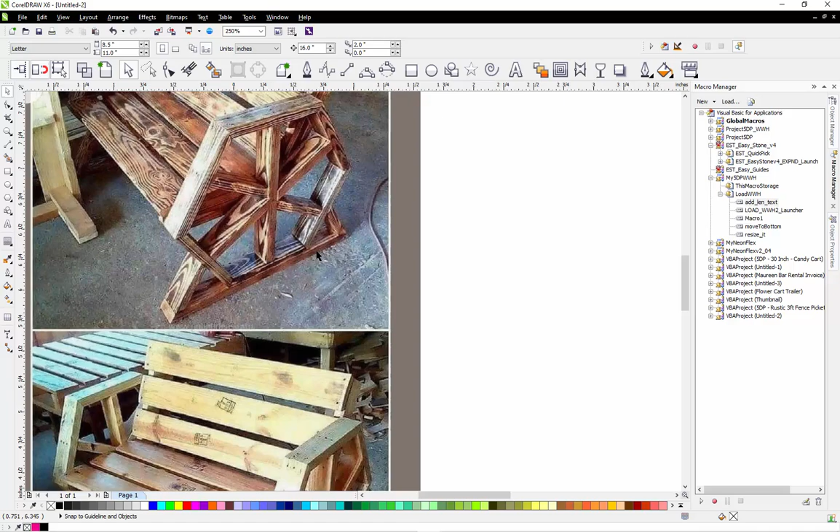The only other thing in this particular design—I'm not in love with these supports. I don't think they're necessary. I think this bench will have plenty of stability without that, but I won't really know until the bench is actually built. I believe this bottom board will be plenty of stability without the supports, but you can see this support board goes straight across here. So in the event that we needed to add that support board, we always could.

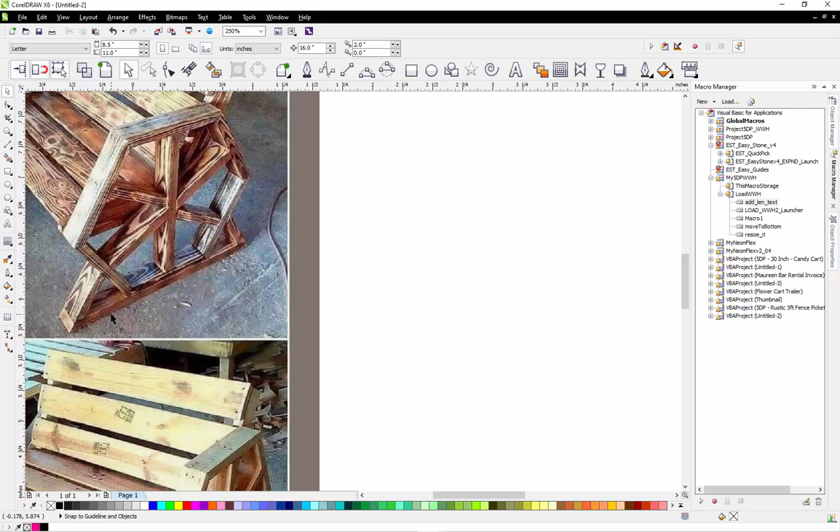If you look closely, it's actually a complete wheel with the support board added to the bottom. There are actually two thicknesses of boards here. So if we need this support, we can always go back and add it in the end. Maybe that's what happened here—maybe they made this, then decided they wanted a little more stability, and added that support board as kind of an afterthought. That's certainly possible, but at any rate, those are the considerations.

So we'll go ahead and get to laying this out and show you how it works. The first thing I'm going to be using here is CorelDRAW for my 2D layout, and I usually use a combination of CorelDRAW and SketchUp.

Of course, SketchUp is free online. And CorelDRAW I've been using for tens of years, so that's what I'm most familiar with. But certainly any application like Adobe Illustrator or Inkscape, which is a totally free vector graphics application, and there's dozens of others, you could do the same process with any of those programs.

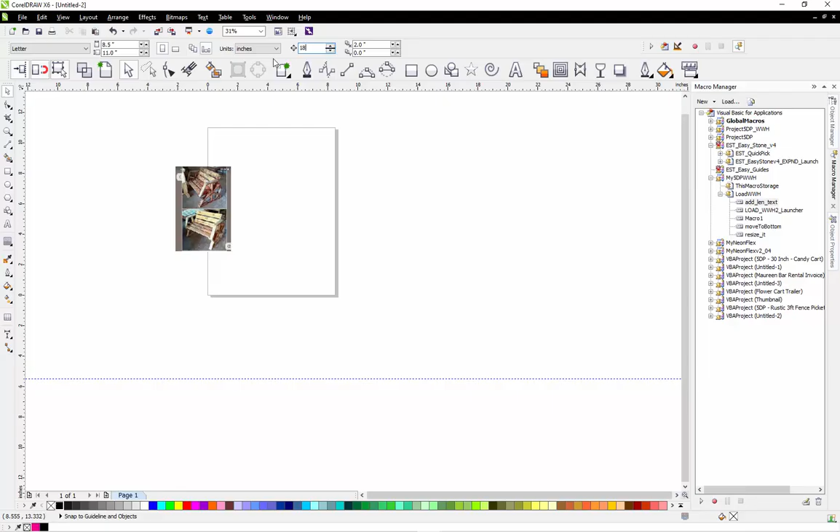So the first thing I'm going to do is pull down a guideline to represent my ground, and then I'm going to offset that guideline 18 inches, which is going to be my seat height. So there's my seat height.

I am going to create a rectangle and make it 1.5 inches tall by 7¼ inches wide. And then I'm going to copy that over and make another copy and make it 3½ inches.

So what we're going to do for our bench seat, for this example anyhow, we are going to do a 2x8, a 2x4, and then another 2x8. And what that gives us is exactly 18 inches. So then we'll make this 3½ inches tall.

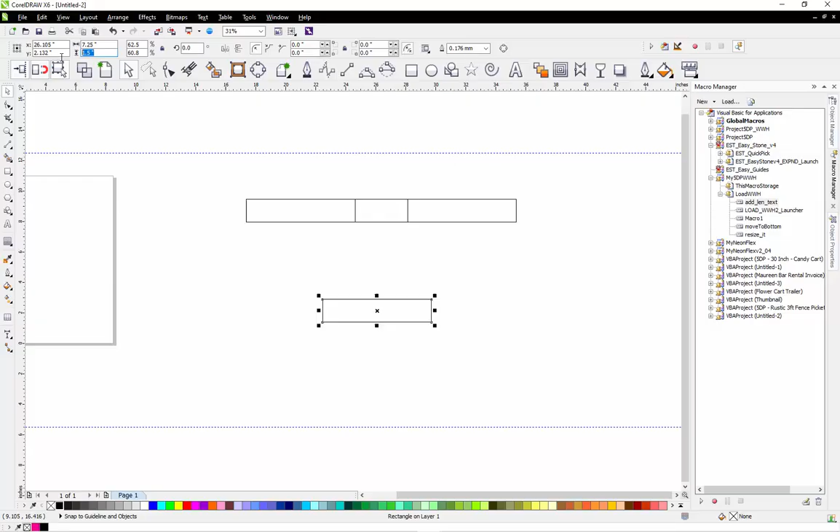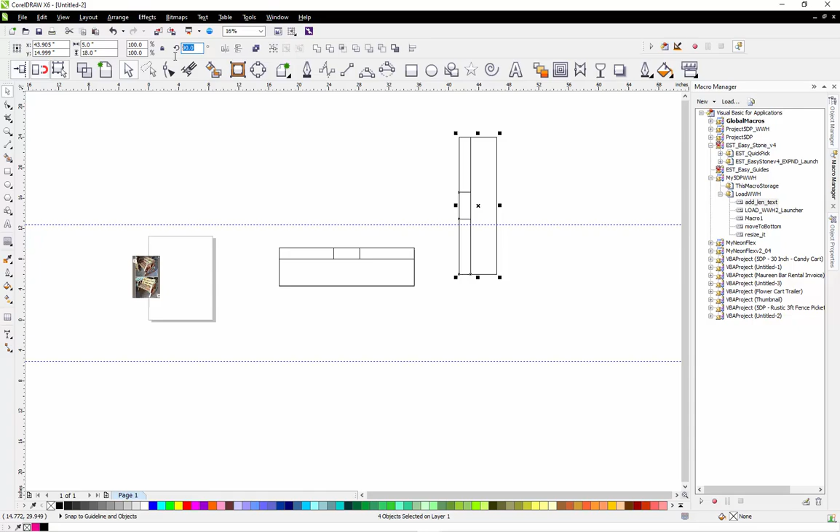This is going to be a 2x4 for the frame of our bench. And then our back is going to be the same as our bench. So there's our back, and we want it to be at a 10-degree angle. So that's what 10 degrees looks like.

Okay, so now we need to go ahead and create our wagon wheel. Now we're going to move our bench up to that 18-inch line. So there's our seat height. So now we're going to make our wagon wheel.

So I'm going to just draw out a line, and I'm going to make that line 16 inches. Now there's nothing magical about that dimension. That's just where I want to start at and see how the wheel works out.

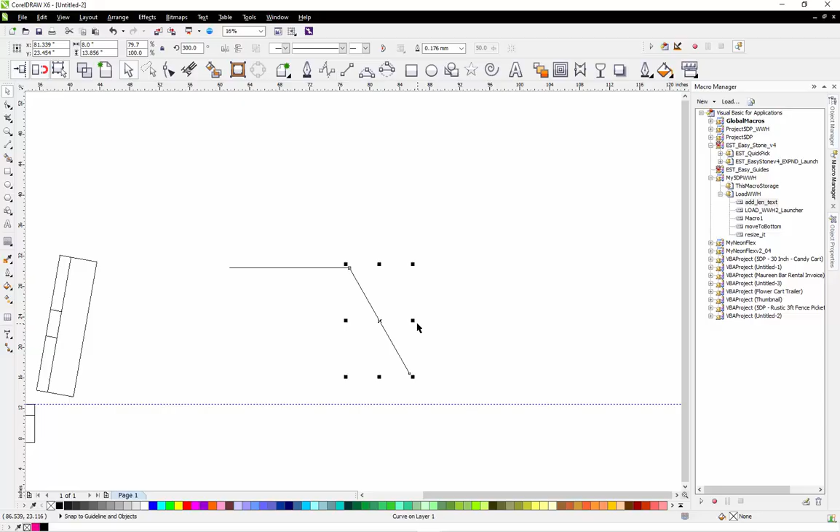So we're going to make a copy of that line, and then we're going to rotate it -60 degrees. There we go. And then we'll bring this in, and then we will flip it over, and it's going to go over here. And then we're going to flip this down, and there is our wagon wheel. Okay, so it's a 6-sided wheel here.

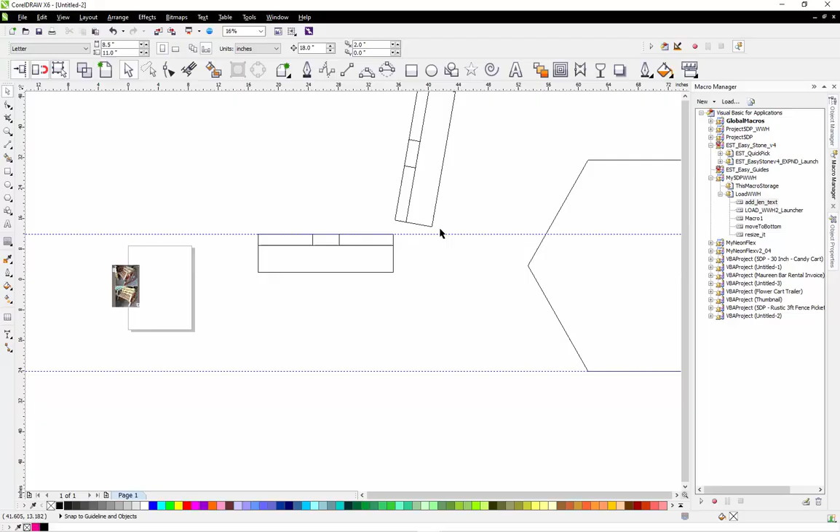So we're going to put that on the ground like so. So the next thing we're going to do is, let's take this and let's combine it, and then let's do a contour to the inside. So how are we going to do that? Let's see, yes, we want.

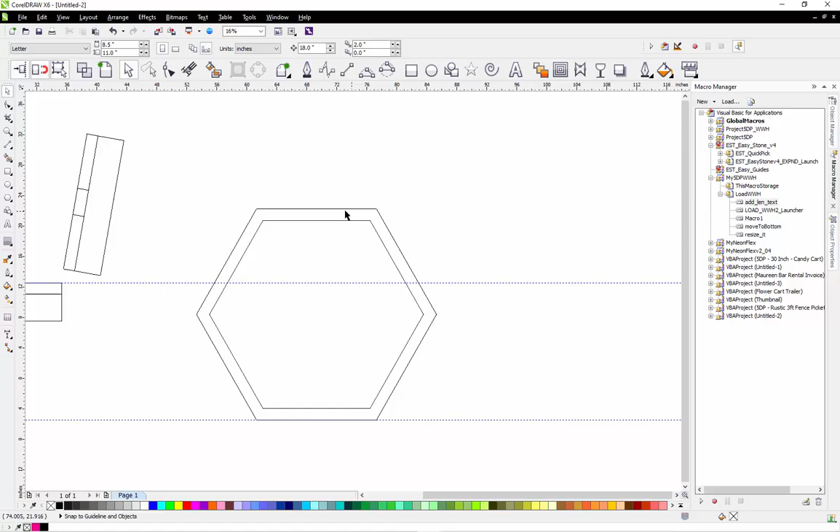Let's back that up here. So we're going to do 1.5. And then we are going to break this apart. So this outside one we don't need, let's break that apart. So we just need this inside one, and this is 1.5 inches. Okay, so that is what we want.

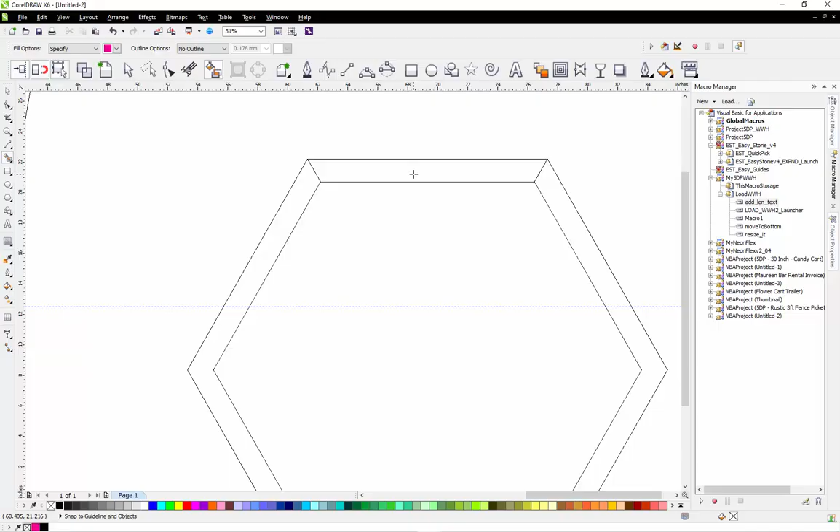Let's see here, what do I want to do? Let's go ahead and do this here. So let's go ahead and use our paint bucket tool and fill that in like so. And then let's just get rid of the rest of this. So this is the board that we need to cut. It's going to be 16 inches long, it's going to have a 30-degree miter on the ends here, and it's 1.5 inches thick.

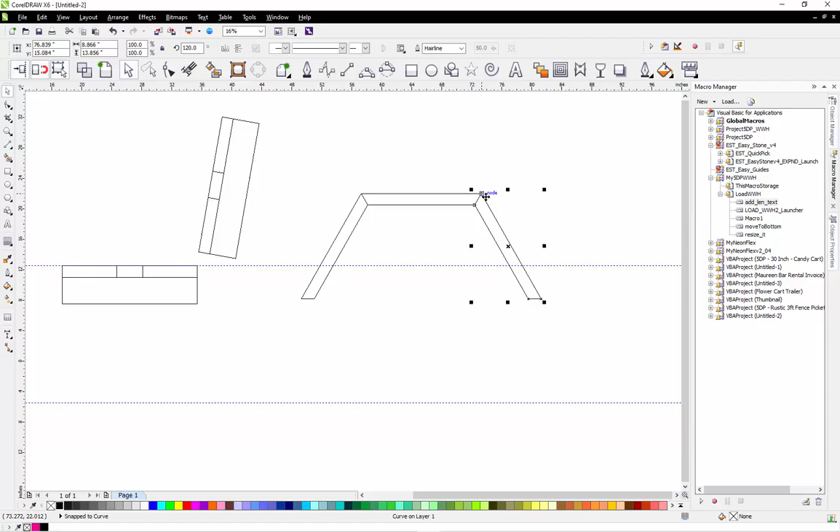So that was one question that we had, was what size board do we need? So we need 16-inch boards. So we're going to do that, and we're going to mirror that over here, and then we're going to mirror that. And then we're going to put this right on the ground.

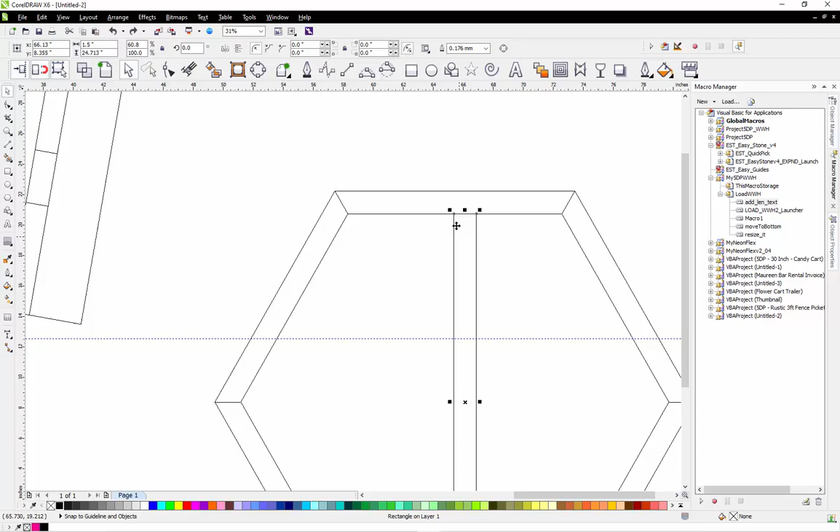Okay, so now we know that according to the picture that we had, we have one vertical piece that is 1.5 inches. So it's going to go right dead center of that. And then we had this piece that—what we're going to do here, let's see, what do I want to do here?

Let's go ahead and we'll fill that and that. Then we can get rid of—let's rotate this like so, and I'm just going to push this up like so for a moment. So these here, we are going to have no fill, go like that.

All right, so this right here, we're going to do something a little bit different. So this point right here, we want to move down. So let's go ahead and do that real quick. So let's take this.

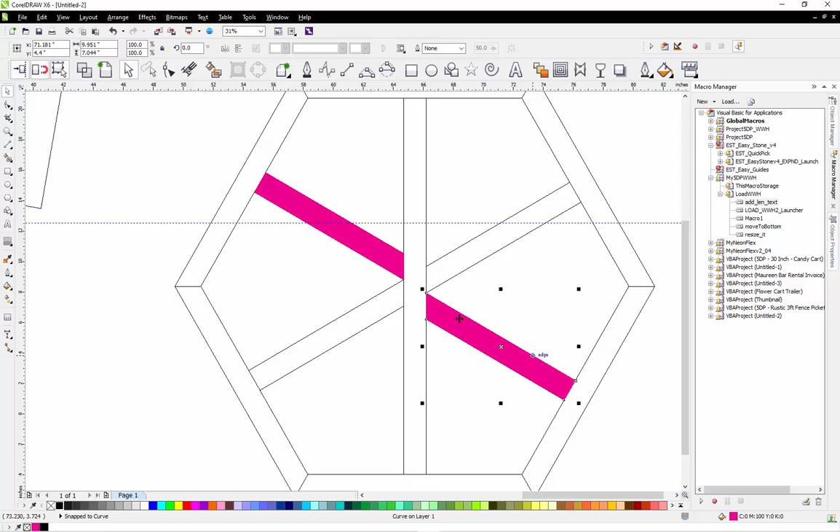We're going to add a node so I can then pick that up and move it right there. And then we're going to take our fill bucket, and move this down. Take that node and put it right there in our fill bucket like that. So then these two, we are going to have no fill, right click, and that's our wagon wheel.

Now let's compare this to the original drawing. You can see here we have that one vertical member going through. Now this horizontal member here, you can see it's going straight through to the other side, where here it's not. See where it's offset and offset? The reason they're doing that is so that this board doesn't need a double angle.

Now, I'm not sure I'm in love with that look, but that is how it was made. So that's what we're going to run with because that's what was requested. So now we have our wagon wheel here, and I'm going to just slide it over, and that's basically what we've got going on.

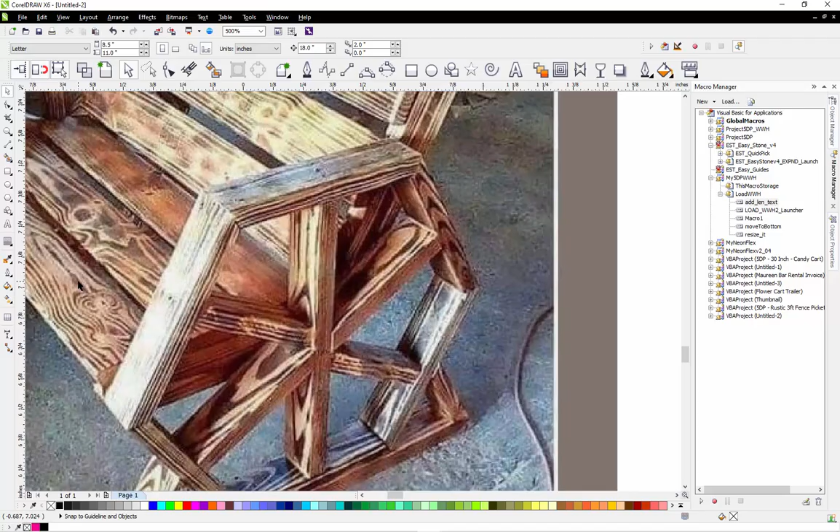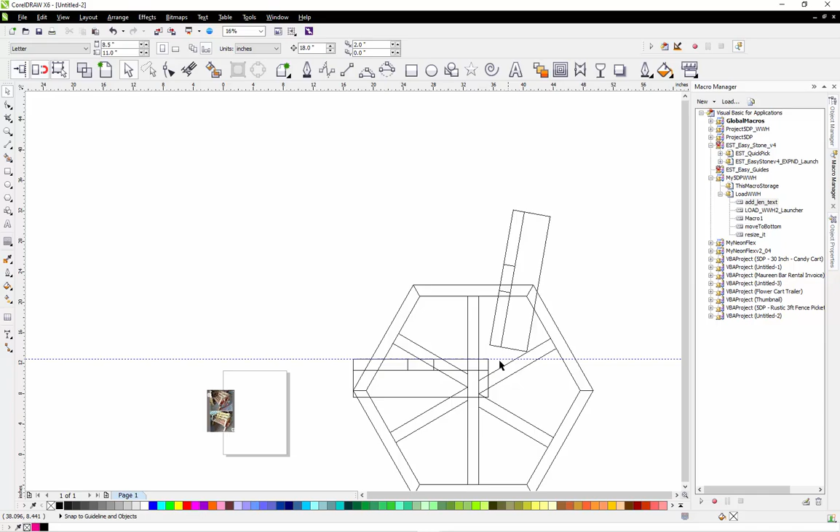So one of the things we want to look at here in the original was this horizontal board here. You can see we can't see it much beyond that. So we have to think about, so our seat support can go here, here, here, here. So as far as the connections go, this board can be mounted here, mounted to this one. There's plenty of screw locations there and here. So I think this is pretty good as far as being able to have something to screw and support everything the way we need it to.

Now, we don't know what the height is here, but look at there, 9 3/4. So that actually worked out really well. Remember I said we wanted 9.5 to use that as an armrest. So that's okay. So the only really thing we got to do is fine tune the position of this.

If we just did it right there, that looks pretty good. So I think what I'm going to do is, what do I want to do? I think let's do this. Let's move it. I'm going to move our back a 1/2 inch back and a full inch up.

Maybe I want a 1/2 and a 1/2. So we have this gap right here. No, I think we can go a full inch. So I think that works good.

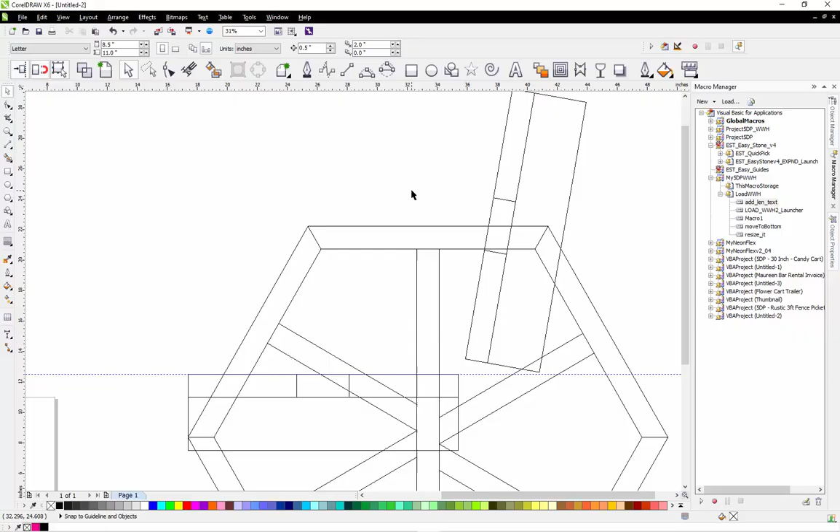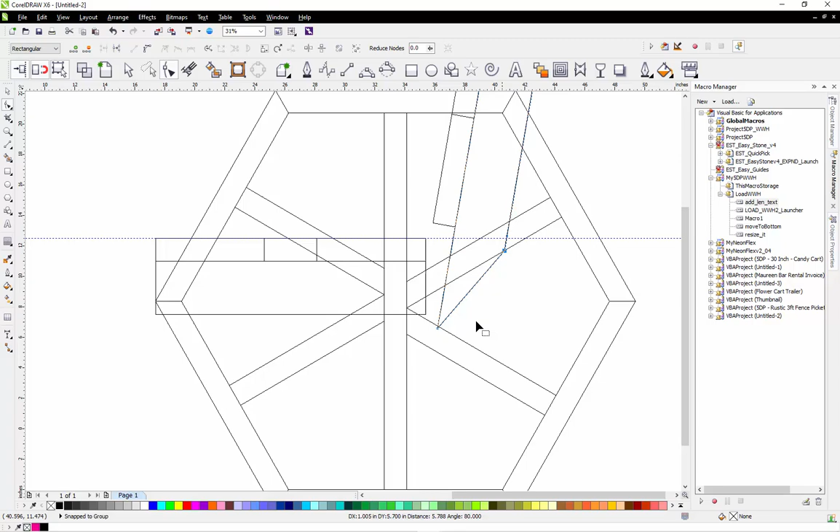The only other thing that I'm going to do for our back here is we're going to extend this. So let's do that real quick. Let's extend that. But then we're going to cut it back so that this is in line like that. So we're going to screw there, screw there, screw there, and that will support our back really nice.

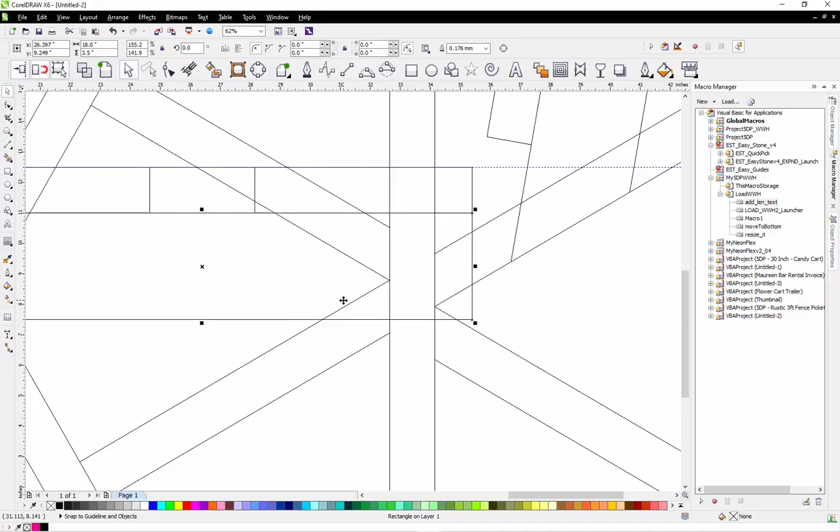And I'm thinking here on the front, on this other piece here, I don't know. No, I think we're good there. The only thing I might do differently here is let's see here. I'm trying to think. I'm going to cut this off. I'm just trying to figure out exactly how to do that.

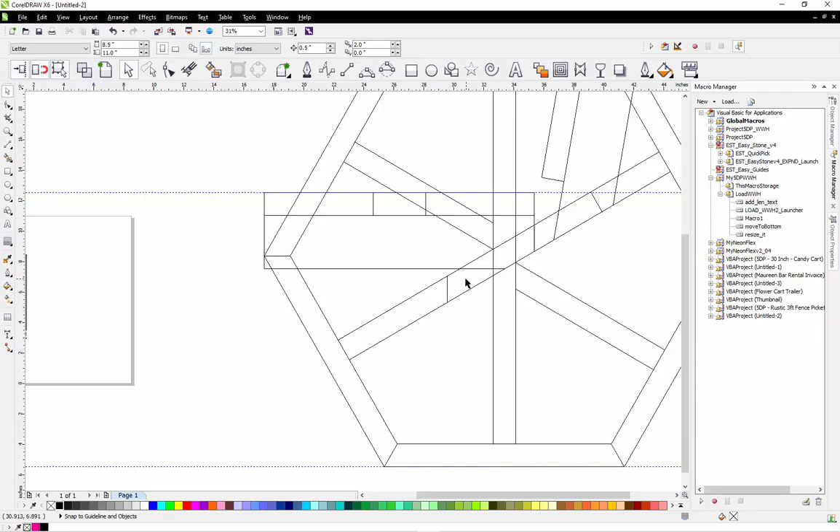So this seat board here, bring that back to here. So we're going to just chop that off just like that. Okay, so this is our seat board, and this is our back. And I think that looks pretty good. I think that'll work out.

So that is essentially how we would go about figuring out how to make our back. Now, I think what I would do, let's see here, just to polish this up a little bit. Let's go ahead and make that back to 90.

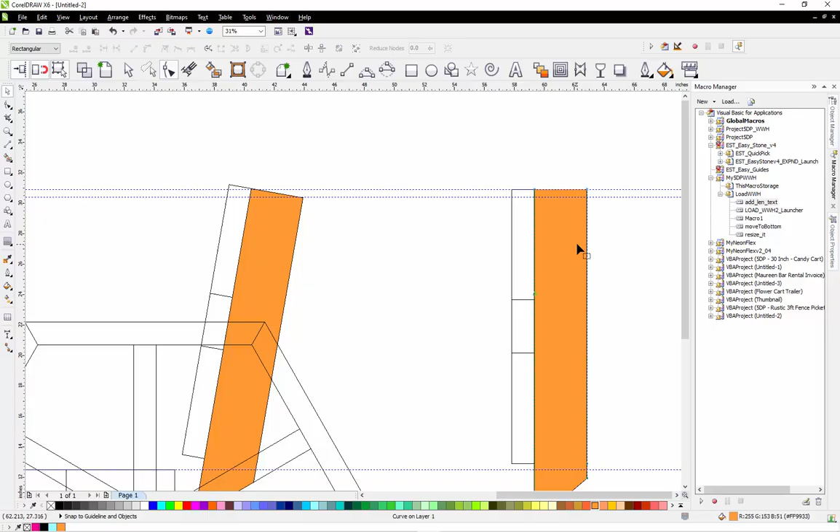So I think to polish this up a little bit, I would go, yes, a 1/2 inch. So instead of having this go all the way up, I think I would stop it there.

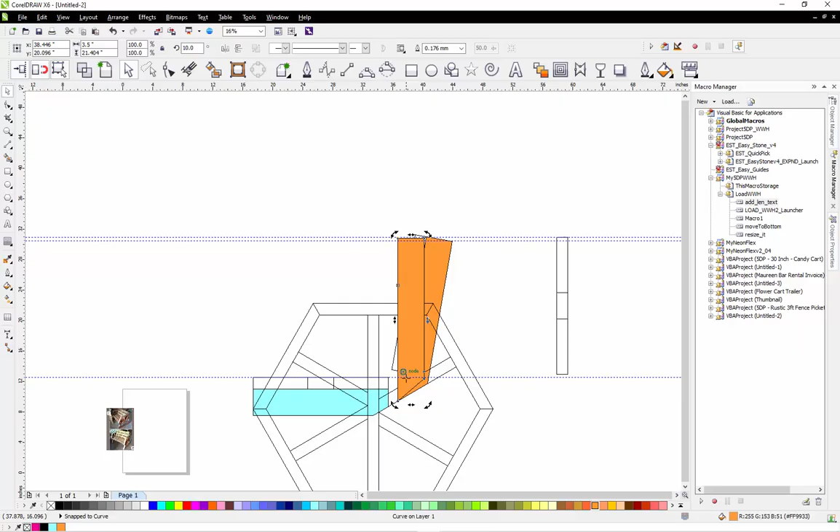So we'll move that back down like so, and just delete that one. There we go. So that looks good. So we'll do that.

And then for the front here, we'll do a similar thing where we'll just push that back like so. And I think that looks pretty good. And if you look at the original, you can see how it was kind of pushed back too, but this was kind of chopped off here at the front. So in this case, I don't think it's really necessary.

So as far as screwing in our seat board, we'll have this piece we could screw it into, this piece we could screw into, this piece.

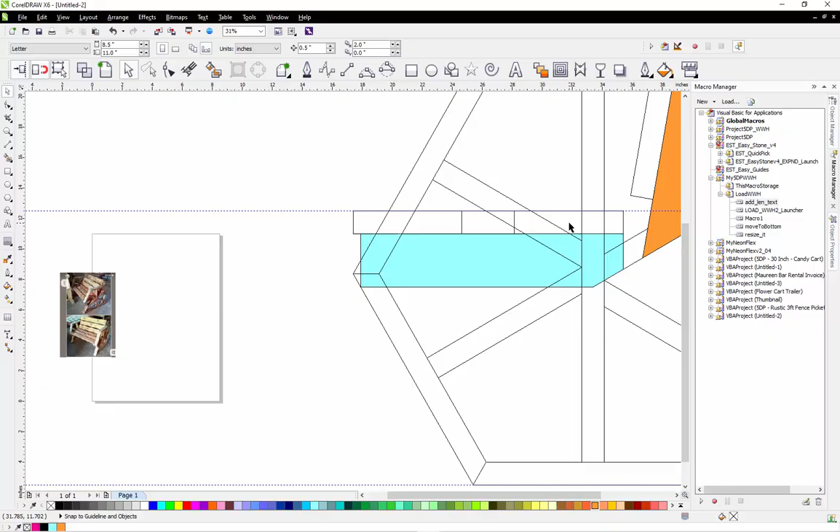So we can have 2 screws here. I think it'll be plenty strong support-wise. Really, we just probably have to build one and see if that configuration works.

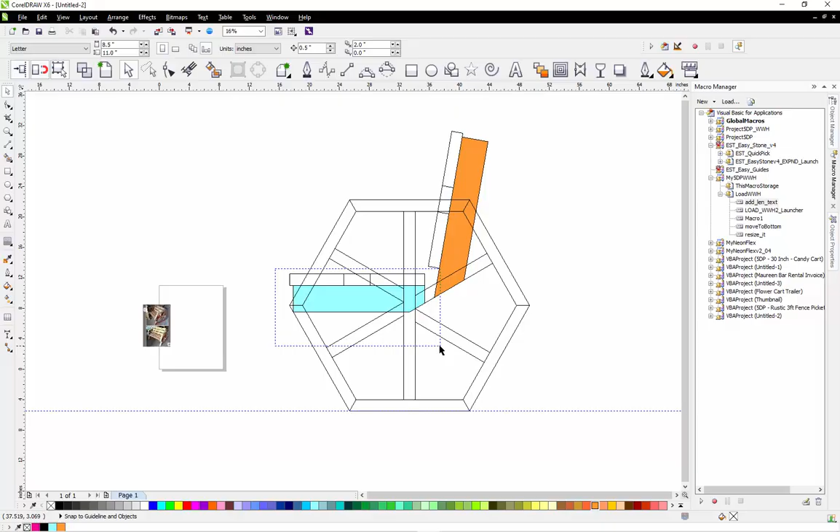Okay, so now what we have to do is kind of pick apart all of the different dimensions and angles here to make sure we've got it all. So what I would typically do is take this lower seat assembly, take this upper seat assembly, put it like that, and then take our wheel here. Looks like I got most of it.

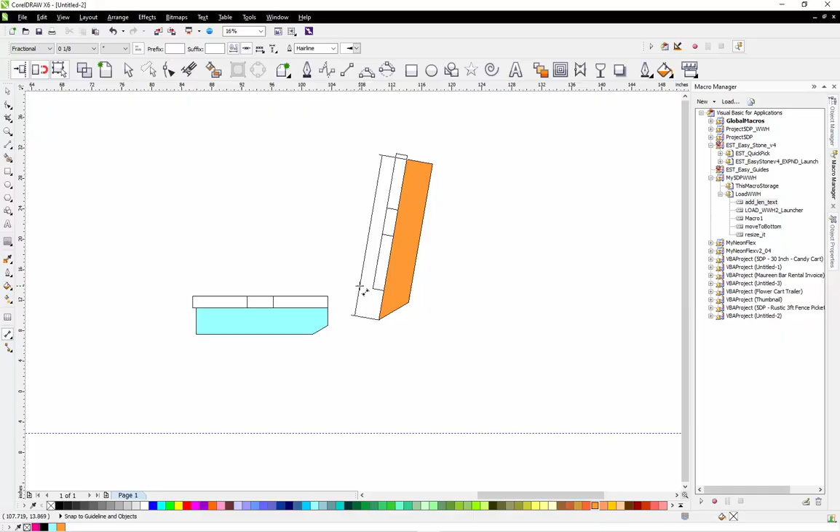We'll make a copy of that so we have some dimensions to work off of. So right here we need a dimension there. Okay, so that's 21 3/8, and then we need a dimension here. So we'll go with a horizontal dimension. So you see that's 17 and a half.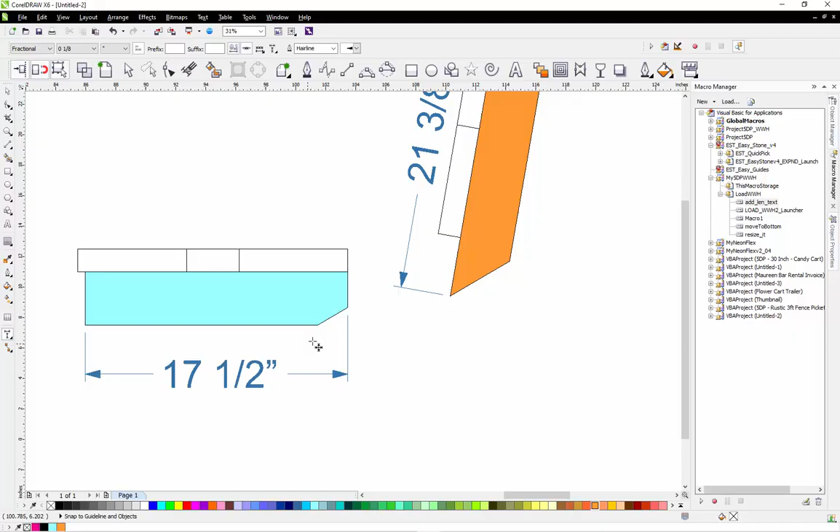And then, I'll tell you what, let's undo that because we need this dimension, but we also need this dimension, and then we also need that dimension. So then we're gonna break that dimension apart and slide it, we'll do that like that. Okay, that works. And this is how I like to do it when I'm dimensioning things.

We can also put what that angle is, and that's fine too. So let's figure out what that angle is. If I were to rotate that, it's 60 degrees. Okay, so we can do that too.

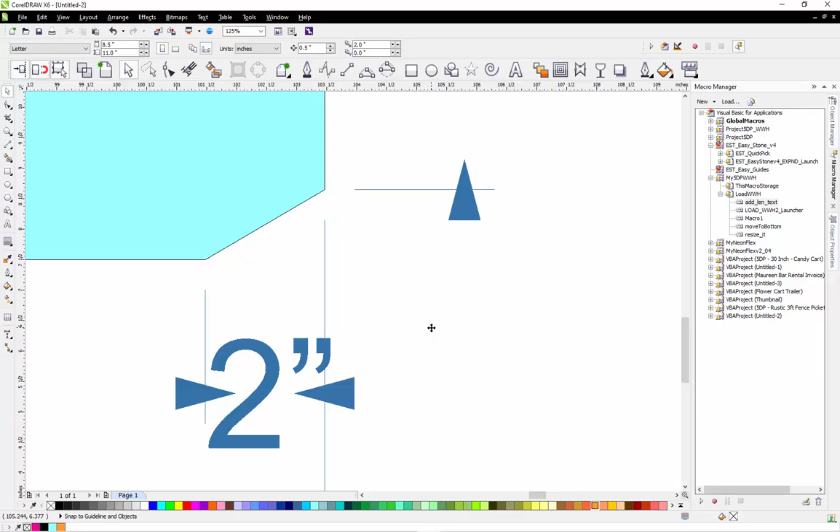So the problem is, most of your miter saws can't actually cut a 60-degree miter. So that's why I just use the 2 dimensions, and then I probably won't even put 60 degrees because of that. Now this dimension here, or this angle here,

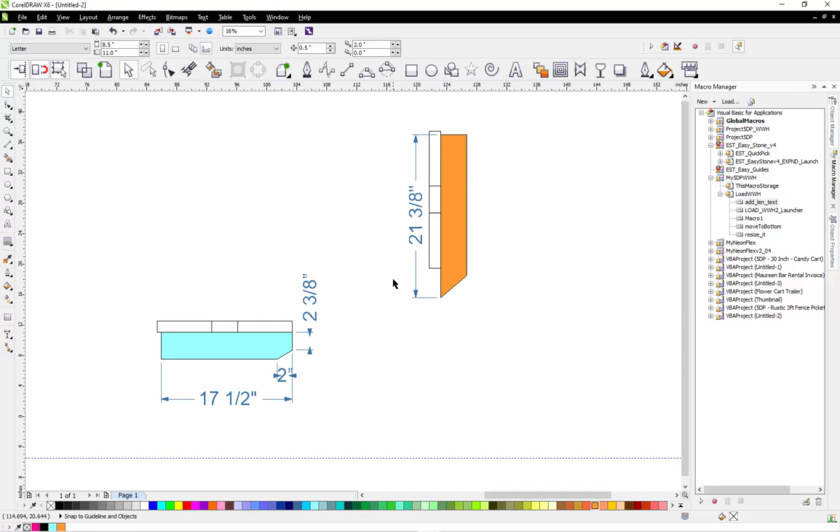if we make this, let's rotate that 10 degrees. So if we do this, right, and then we rotate this, so now you can see that's a 40-degree miter there. So we could just type in, okay, so that's 40 degrees.

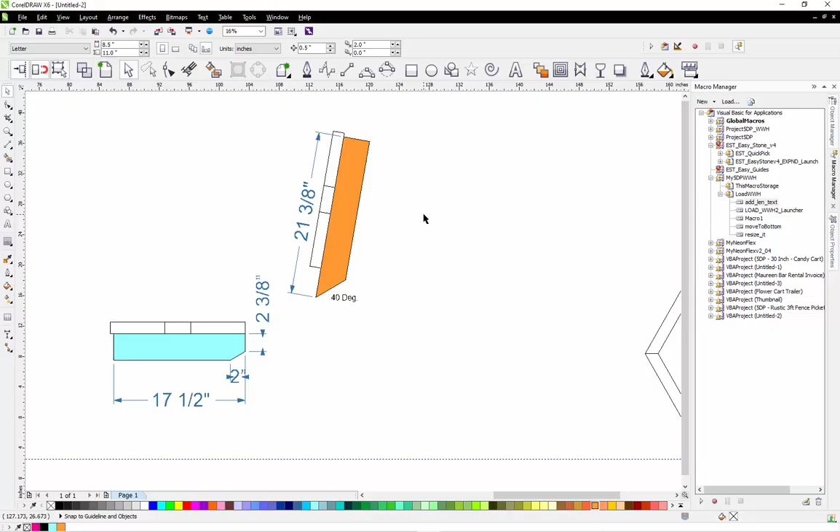And so we make a board that's 21 3/8 long, but then we cut it right there at the tip, and we cut it a 40-degree angle. Okay, so there you go. So then we can go back to, and we might label that bottom seat assembly, back assembly, something to that effect.

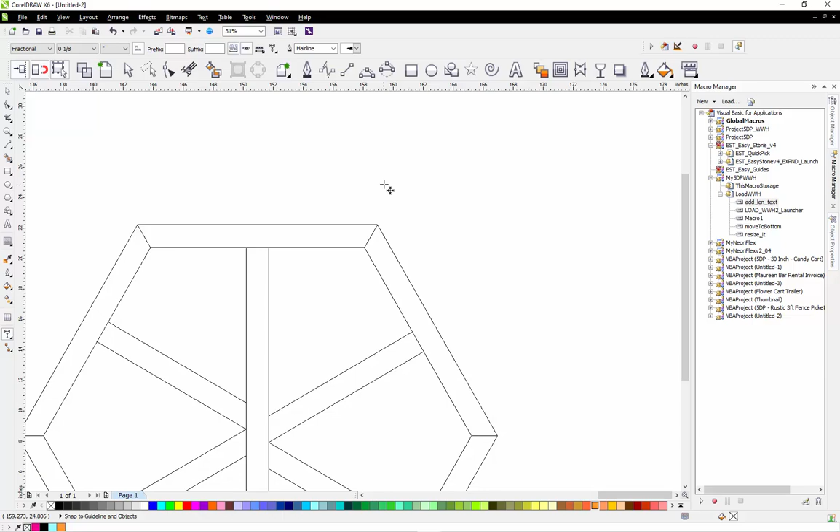So then next up is the wheel. Now the wheel is pretty straightforward because we know that each one of these pieces have to be the same, so that's 16 inches. And then we know that each one of those corners need to be 30 degrees. So there you go, there's 30, and 30, and 30.

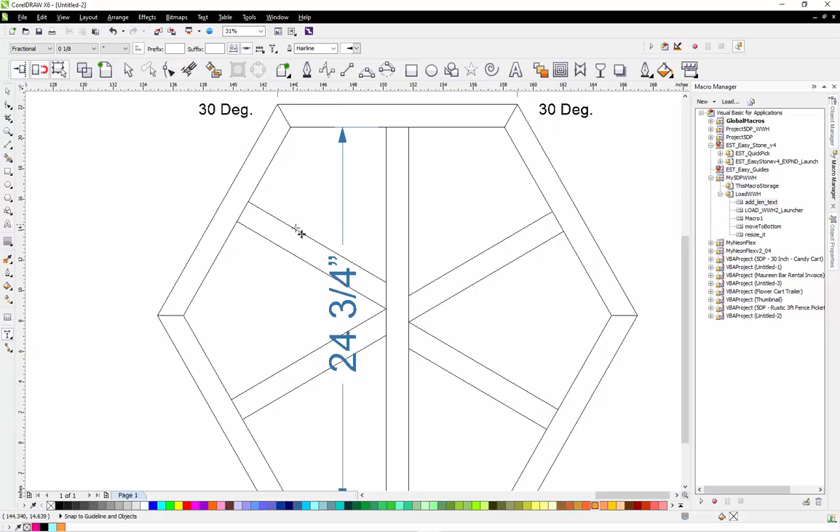Okay, so then we need our vertical dimension here. I guess we could do it this way. It can get kind of messy, so these, really, because of the precision involved, we're just going to make these fit in the field. But we can use these a couple of dimensions here.

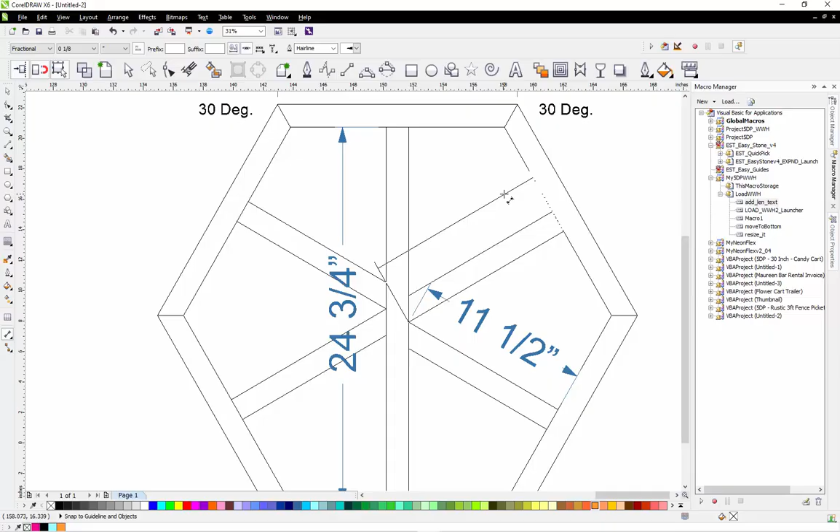So this dimension here, this 11 and a half would be the same as this, and then that 11 and 7/8 would be the same as this. So we don't need to replicate all of those angles so much.

And then as far as, let's see here, let's rotate that -30. This angle here, of course, would be 30. So I just want to illustrate that point, though. So let's make a line here. So all of those would be 30. So put that. So if we were to rotate that, you see there, 30 degrees, yes.

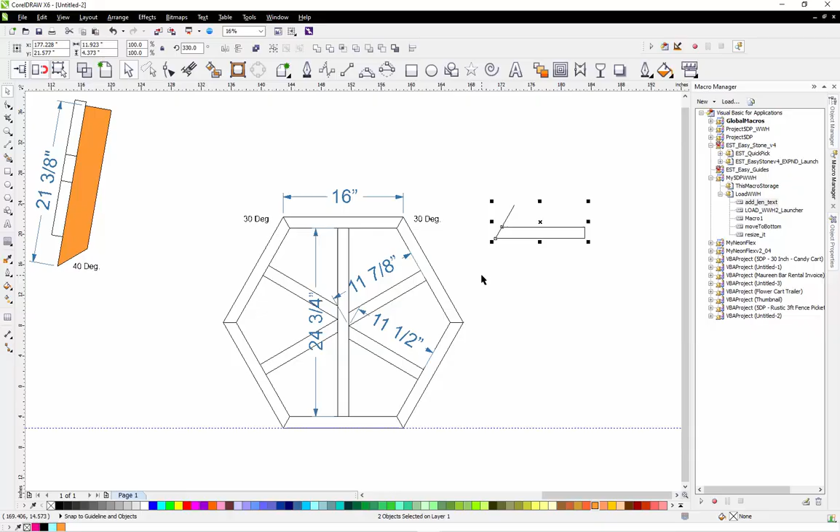Okay, so what we can do then is just kind of copy this down here and say, hey, all of this is 30, 30, 30, 30, 30. So all of those cuts are 30. So if we make a piece that's 11.5 inches and then cut a 30-degree miter there. Now, when you go to build this, 16, 30, 30, those are all great.

But see this 24 3/4? Obviously, I would physically measure this, and it may be slightly more or slightly less than this. So I would not actually use these actual dimensions. And then when I go to put this piece in here, we may want to

find out, when I go to put this piece in here, we want this to be centered here. So it's centered along this, so we'll find the midpoint there and place that board accordingly. So my point is that board may be 12 inches, maybe 12 1/4, who knows? So whatever the field dimension is, then that's the dimension to use. It won't be necessarily exact, but it'll get us pretty close. Okay, so that will take care of all of those pertinent dimensions.

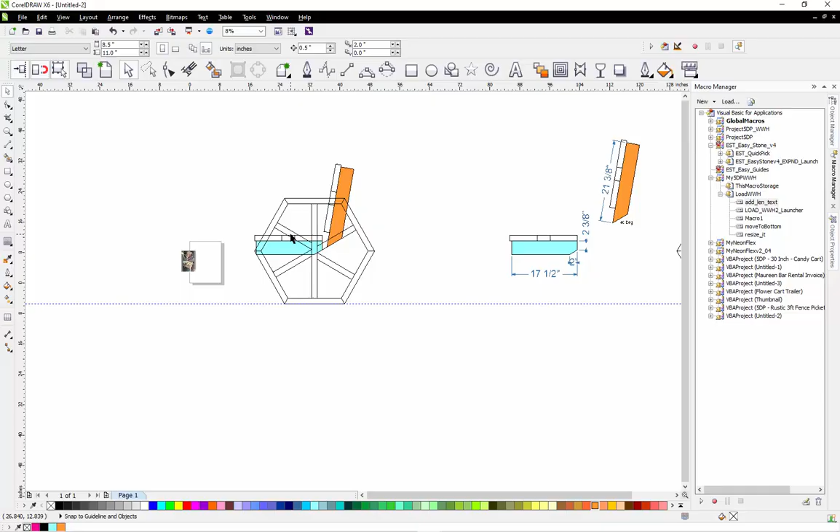So in the original, it's tough to tell, but it looks to me like you have this piece, but there's nothing, there's no middle piece here. So these are just straight span boards, and it looks to be the same down here.

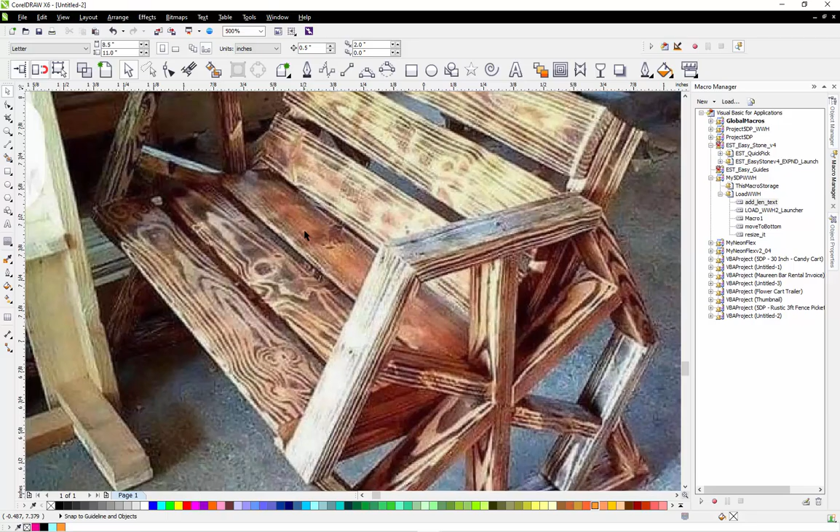Straight span boards. Okay, so when we're building, especially when we're building for profit, we're always thinking about cost. 2x material, 2x8s, are definitely more expensive than fence pickets, right? So that's just something to consider.

What we're going to use for the actual frame of our bench - in this case, maybe to cut costs, it doesn't look like they have any type of framing underneath our bench boards. It's just this board on the side, and then this is a flat span, which I'm not terribly big fan of. Even if the span is only 4 foot, like this bench appears to be, I'm not a fan of not actually having a frame underneath.

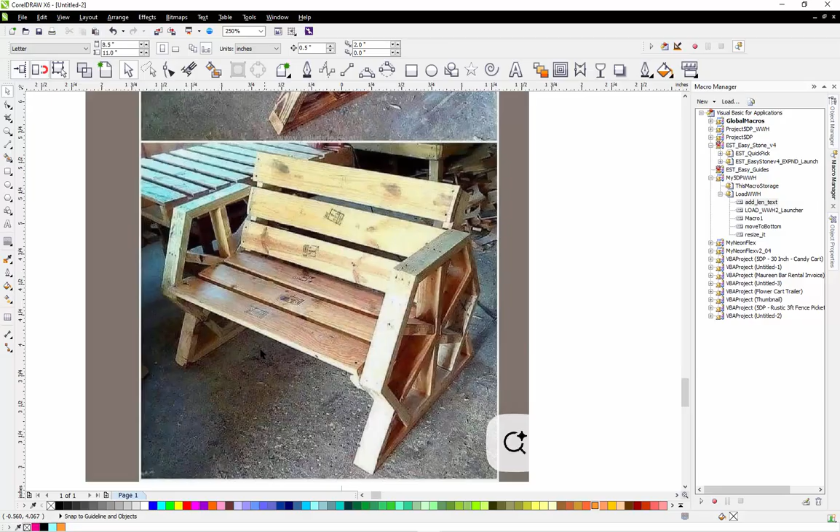So I will talk to you a little bit about that. So you can see here we have 17.5 inches. So what I'm going to do is go ahead and draw me out a 1.5 and 17.5. Okay, so there's that, and I'm going to line that up just like so.

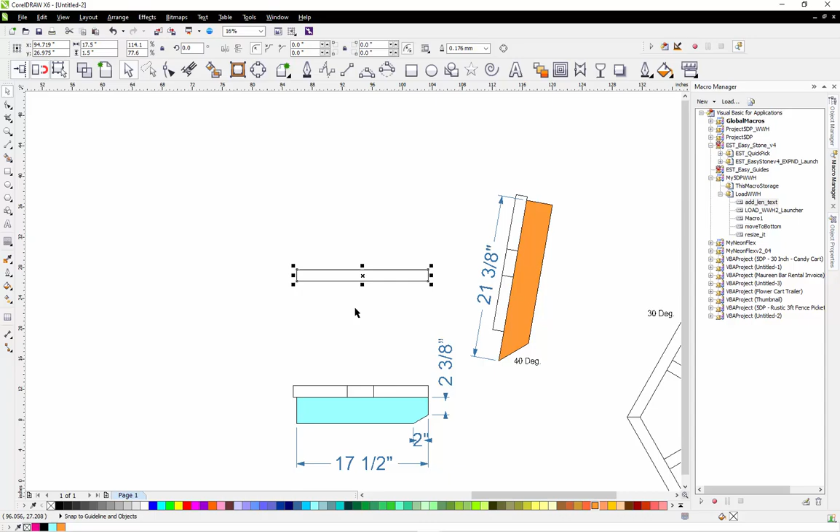And then from here, let's just say we're going to build a 4-foot bench. We'll go with that for this example. So what I would do is right here, probably - so right in line, this distance here is 1.25 inches.

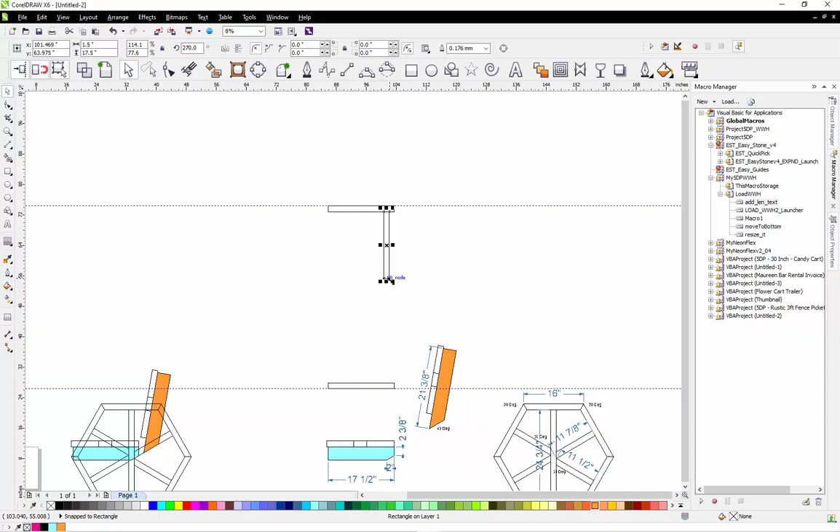So probably what I would do then is come in 1.25 right here. And so this would be, obviously, with a 2x4. And then I would move this forward, and yeah, just do it just like that. And then I would have one in the middle.

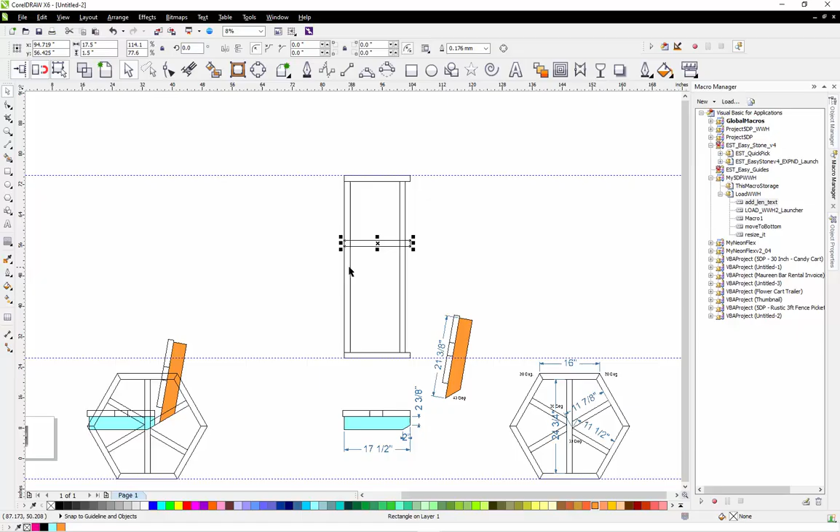Now, the advantage of doing this is we can now have our seat boards be fence pickets if we wanted to, and that would be cheaper than doing all 2-bys and still give you the same amount of support.

So no issues there. So then I would go ahead and dimension this out. So we would say that this is 17.5. We would say that this is 48 inches. We would say that this is 45 inches, 13.25

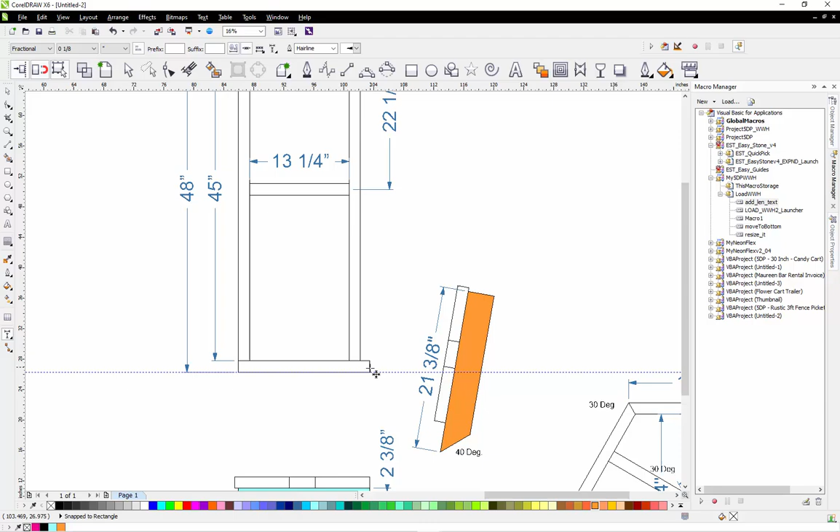to the midpoint, 22.5, and I guess we could put this in here. So that was 1.25 inches. Okay.

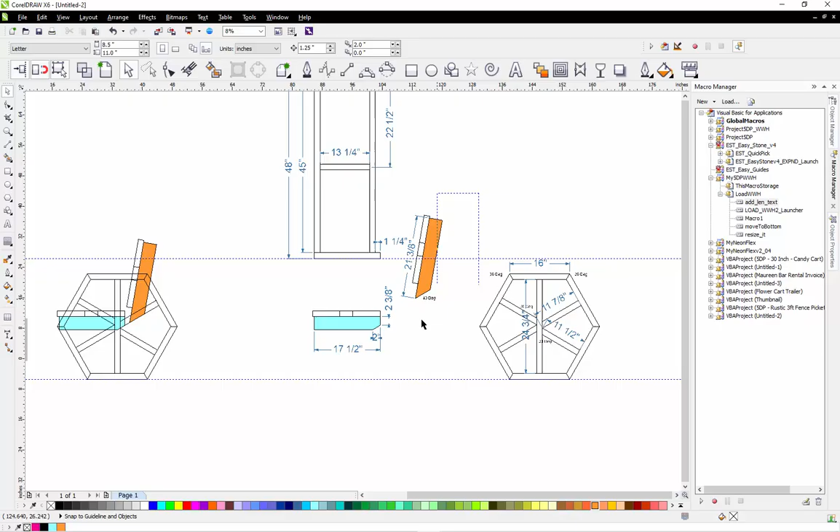That takes care of our seat framing. So the next step then would be our back framing, which would be quite similar, except this piece would be 21 3/8. So that'd be 21.375. Okay, so that's step one. And this one is 21.375.

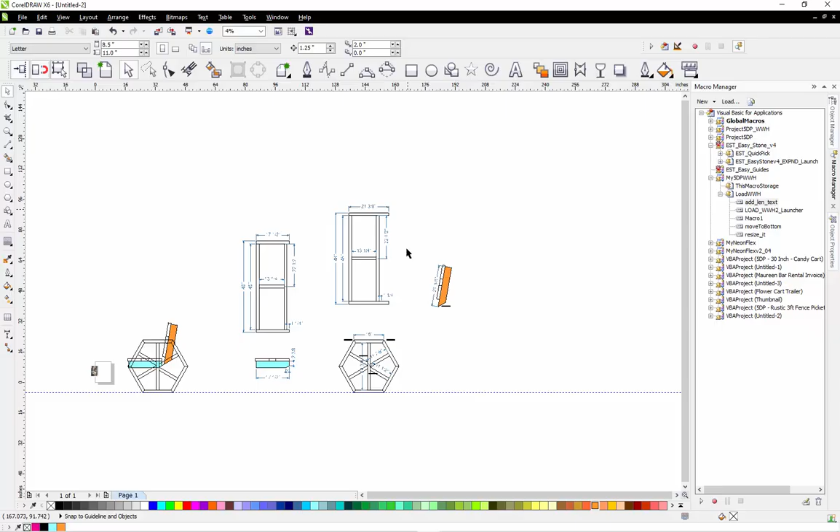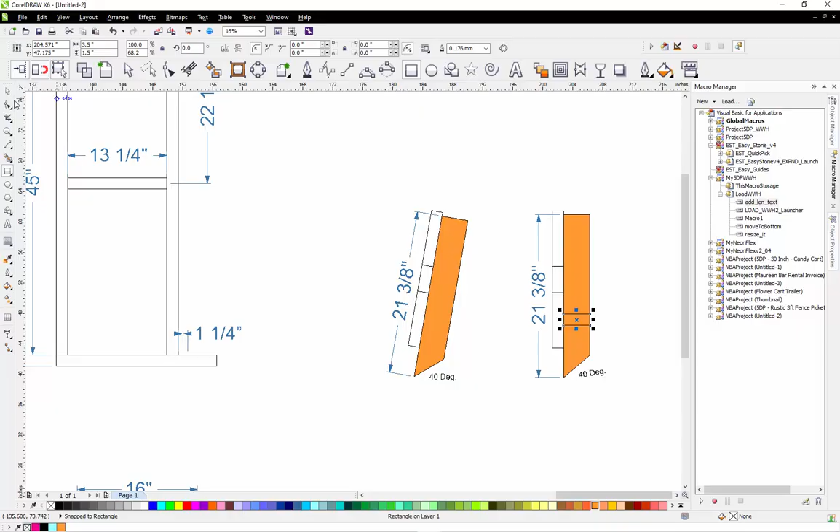And then the one thing that would differ here, let's go ahead and set that at 10, would be - so we'll put that there - would be where this is. So then this is 3 inches. Okay, so we will get rid of that.

And so that gap right here, let's go ahead and get rid of this dimension. So this would be 3 inches, which would in turn make that bigger. 21 3/8, everything else stays the same. Okay.

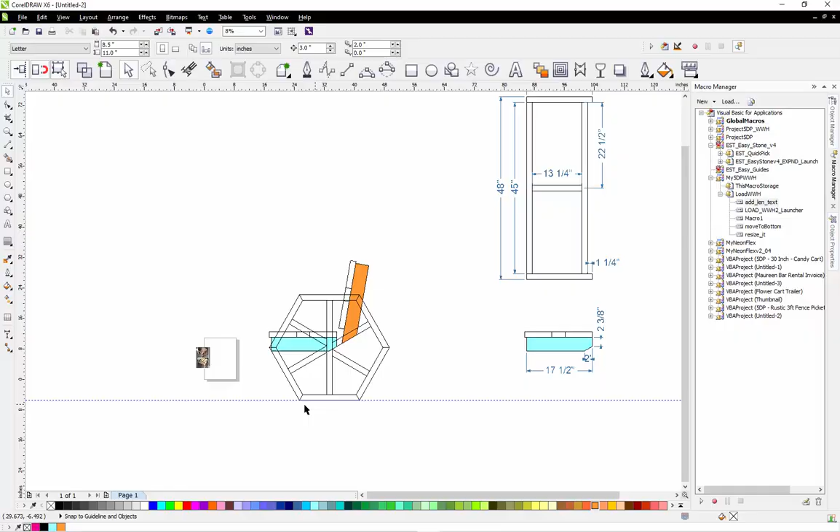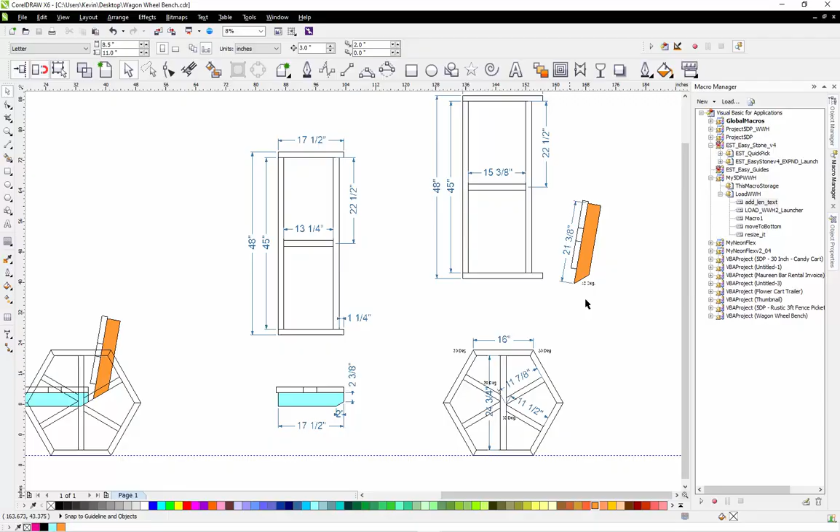So there you go, that is what we would have total. So let's hit File, Save As, Wagon Wheel Bench. Okay. And that's what we'd be looking at. So now we have all of our necessary dimensions, and now that we are good to go.

Okay. So now what we can do, if we want to take it one step further, what I like to do is I'd like to figure out exactly how many boards it's going to take to make this. Okay.

So we need a total of, for example - I can just delete that - so those are 16 inches. 16. So we need a total of 12 of these. So there's 3, 4, 5, 6, 7, 8, 9, 10, 11, 12.

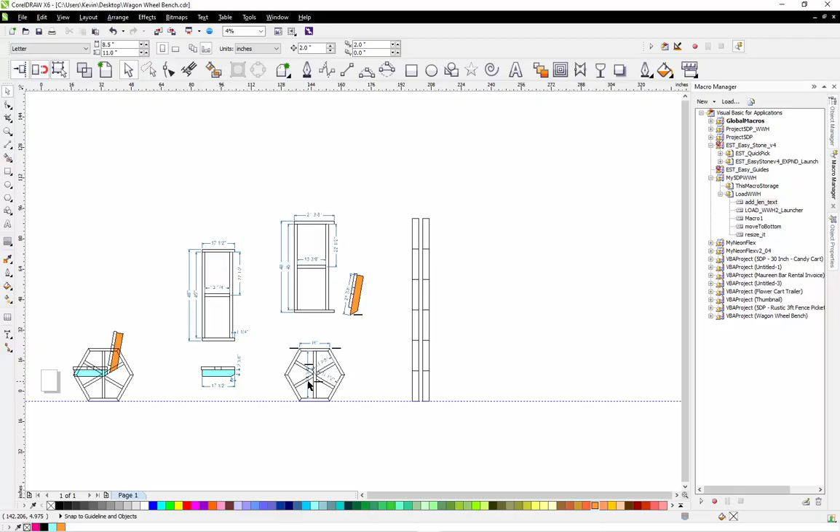So let's see how big 12 is altogether. 192. Don't know if this would actually work out this way, but 6 of them are exactly 96. So I don't think we could actually get 6 out of a single 8-foot board. So that's just something to kind of keep in mind.

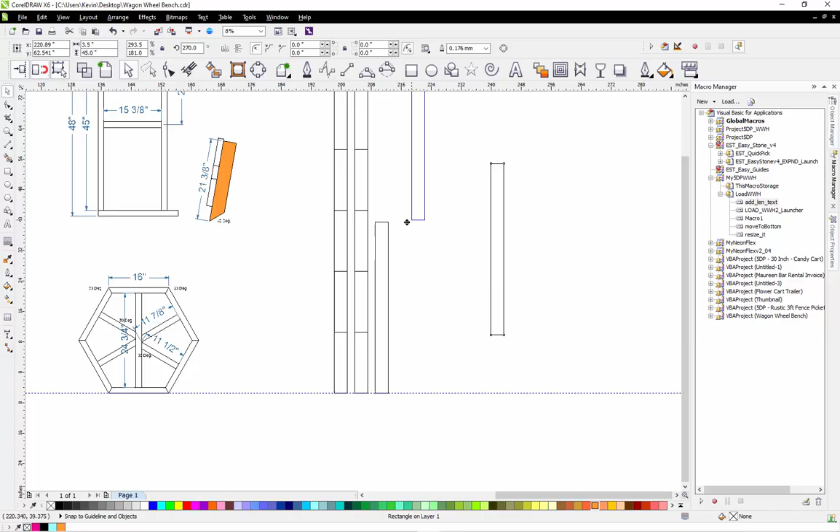So what I'm going to do is I'm just going to move those up a little bit. Those are a question mark for me. So we need 2 of these, so we'll make this 3.5, and that we can get out of an 8-foot board because they're only 45 inches. We need 2 more of them that would take care of those for our back.

So we will go ahead and make 2 more of those. Okay, so then we need 2 of these that are 17 and a half. So make that 3.5.

And then we're going to need 21 and 3/8. We're going to need 2 of those.

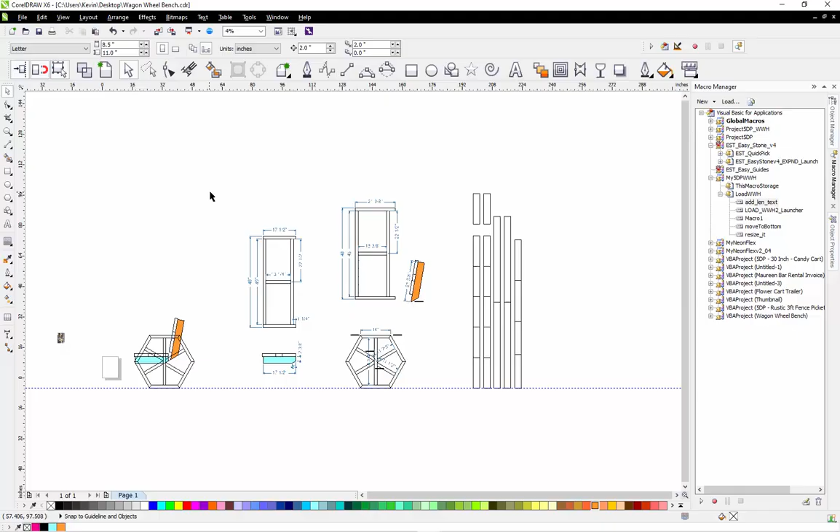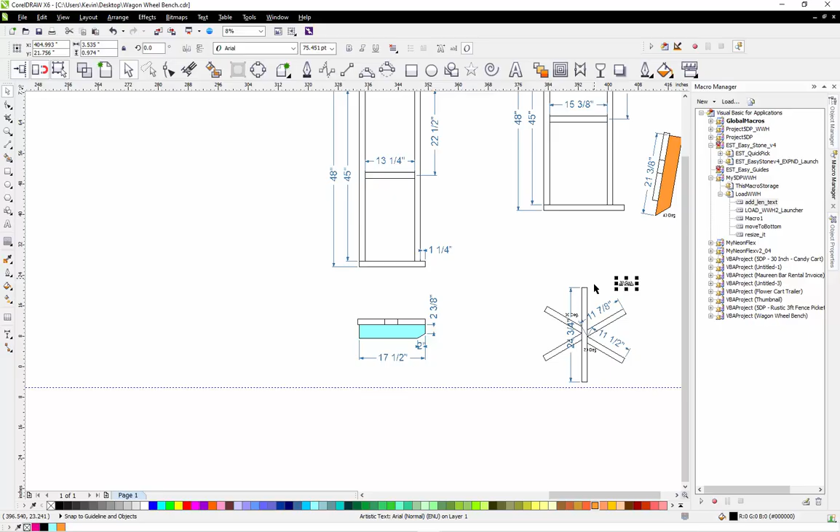Okay. And what I like to do when I'm doing this, I like to make a copy. And then as I...

Use up and define the boards, so we know we have all the boards we need for our wagon wheel. We know that we have all of our boards for these 4 45s, right? We know that we have our 17 and a halves, and now we have those. So in this case, we have 13 and a quarter. So we only need 1 of those.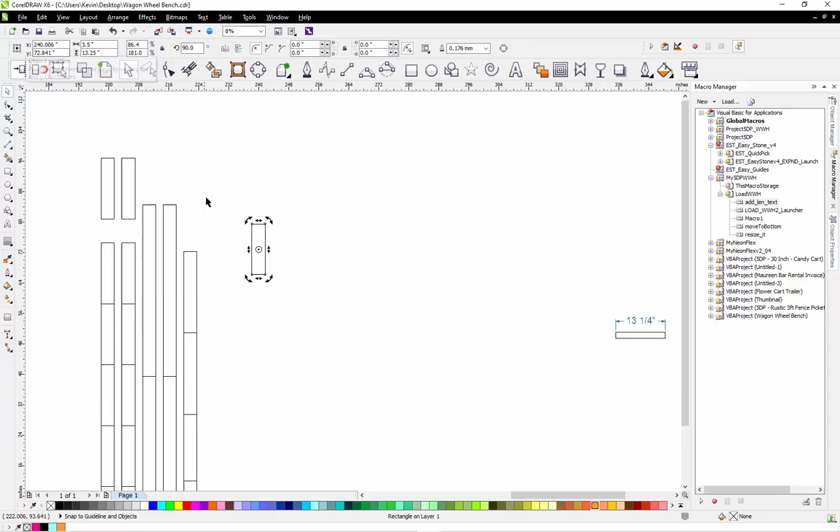So now I can move that right there. And that was taken care of. And then we need the 15 and 3/8. 15.375. So now we have that one taken care of.

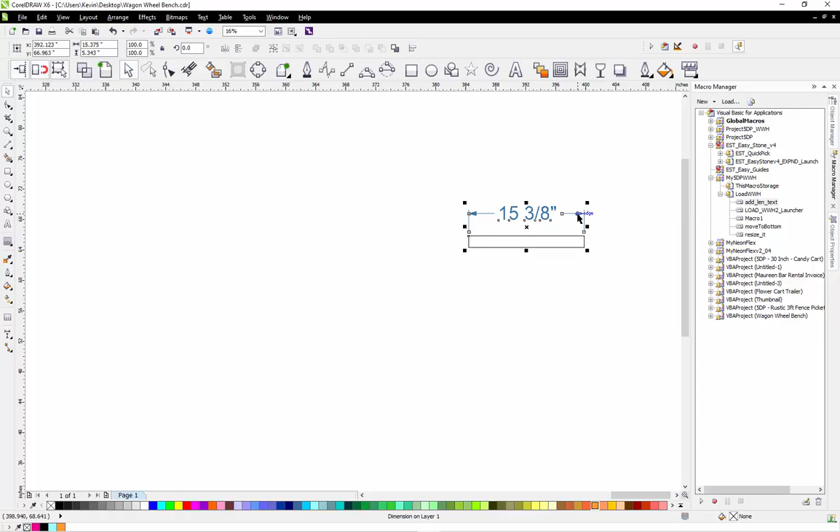We need a piece that's 24 and 3/4. And we need 2 of those, 1 for each wheel. So now we know that's taken care of.

And then we need 11 and 7/8. I'm just going to say 11 and 7/8 times 4, even though that's really only 11 and a half. That's okay. 11.875. Or you know what, really, let's just make it 12. And then we'll fit those by hand.

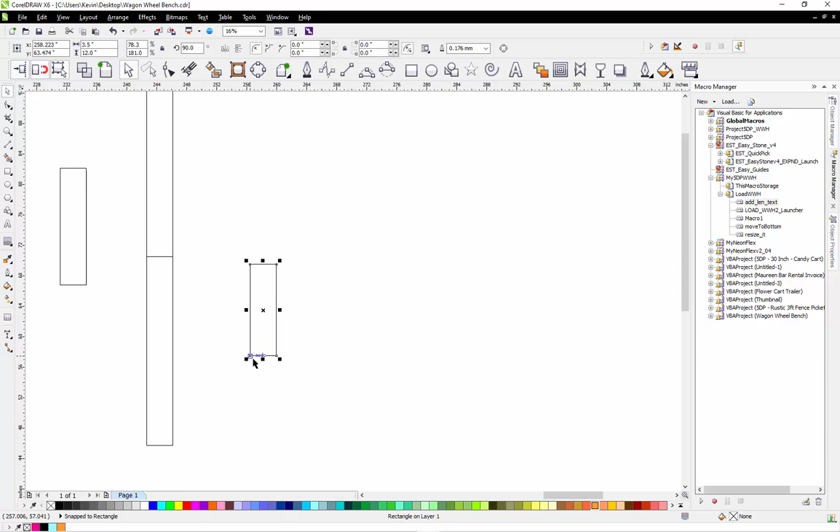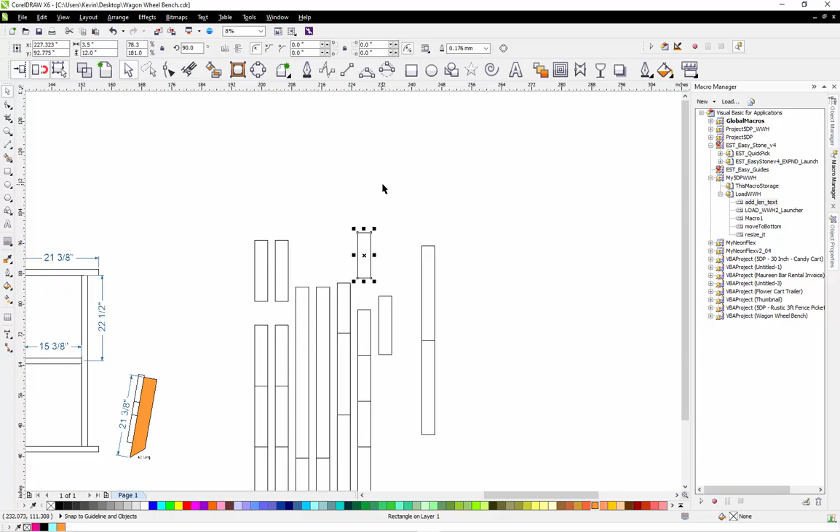So we need 4, so we need 8. 1, 2, 3, 4, 5, 6, 7, 8. So now we have all of our pieces, but again, I don't think we can get 12 pieces out of 1 stick for real. So no worries.

Then we still have these two dangling out here. So I think what I'll do is I will go ahead and leave those over here and just say this. For simplicity's sake, let's do this. Boom, boom, boom, boom, boom, boom.

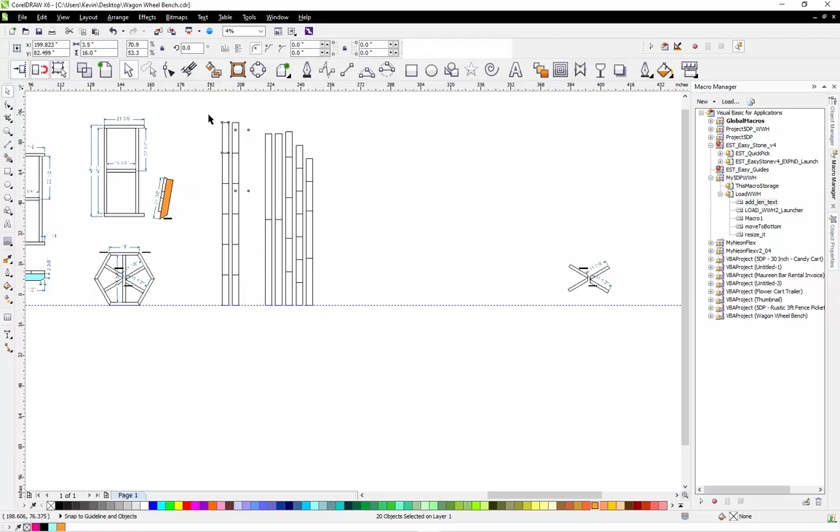So these, we need two that are 10 footers, because I really don't think we'll get those out of an 8-foot piece. And then we need 1, 2, 3, 4, 5 8-footers. And that will give us all of our framing for our frames for our seats and our back, our wheels.

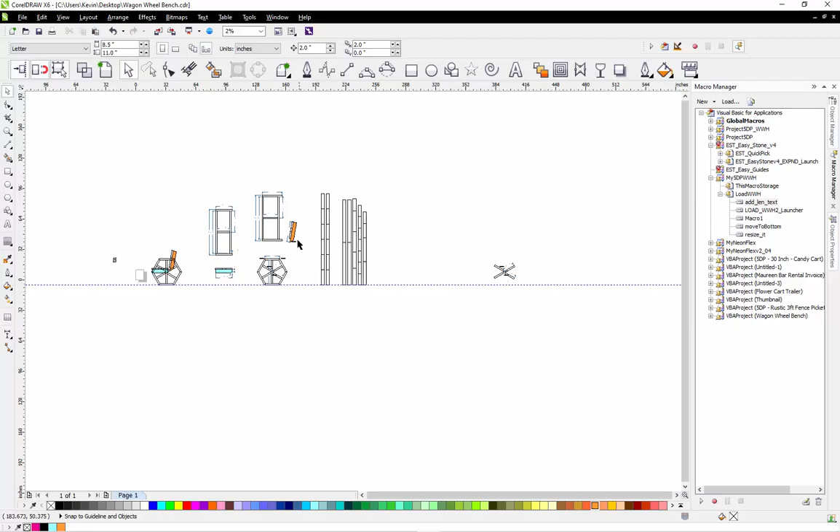And then the only other thing to consider is the seat boards. So we will do those at 48 inches, and we'll do 7 1/4. Those we will get out of an 8-footer because it's just one cut.

So one for the seat, one for the back, and then we'll make those 3 1/2. There you go.

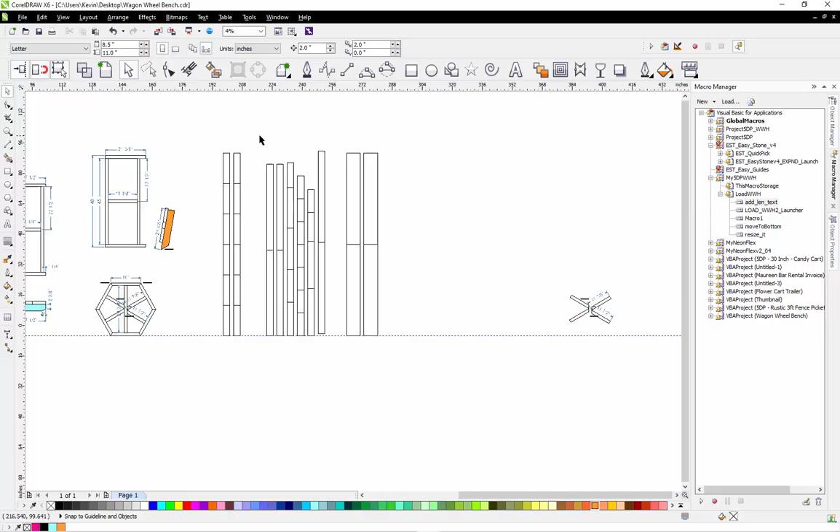So that is what we need. So we need 2 2x8 by 8. Go ahead and make this a little bit bigger here so we can see it. Then we need 1, 2, 3, 4, 5, 6 2x4 by 8.

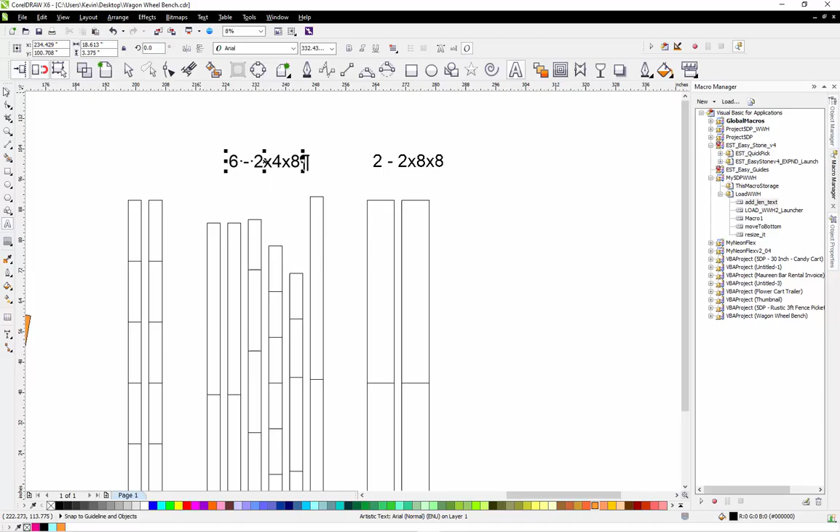And then we need 2 2x4 by 10. There you go. So then we'll go ahead and populate this.

I have a special macro that I developed that will add in all the dimensions of our boards. Fancy, huh? So now we can go ahead and...

Make our plans. So I have this, which I will resize to fit. Boom. So scale this down a bit. That just gives us an overall side view

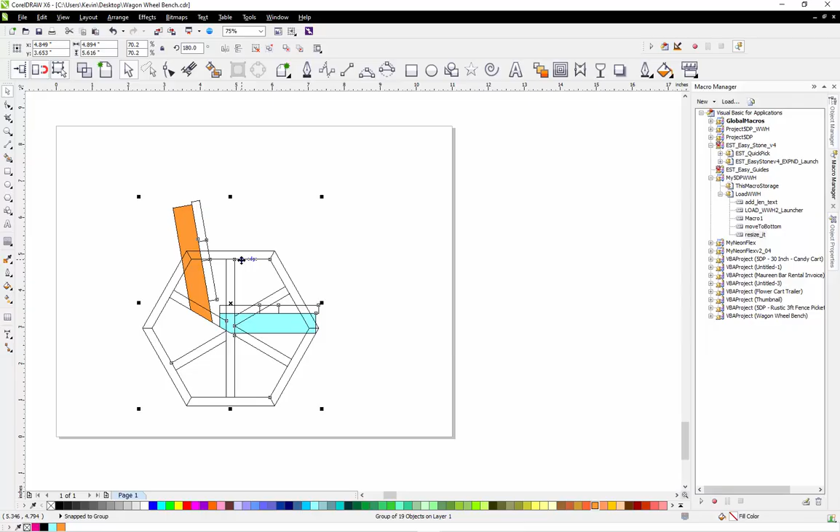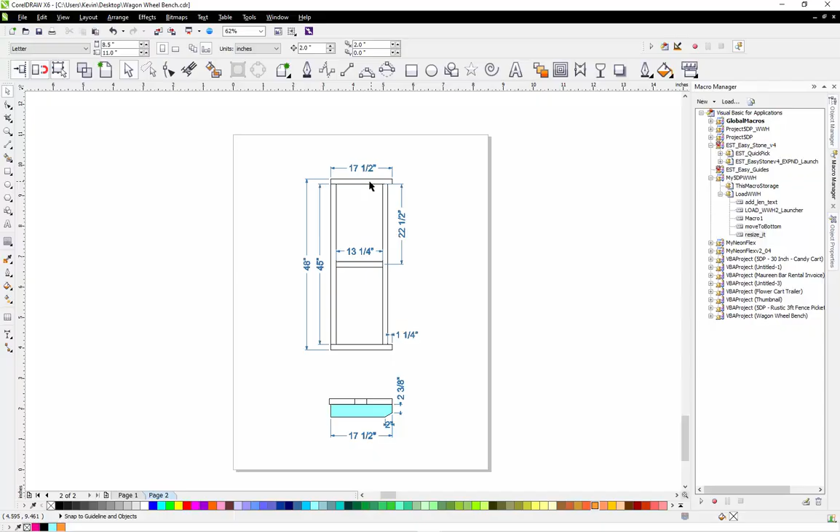of our project. I may flip it. I like to have my title block up here in the upper right hand corner. And then we will have a page for our seat framing details. Okay. And then we will have a page for our back framing details.

And then we will have a page for our material cut list. So there we go. We now have plans for our wagon wheel bench. So let's go ahead and we'll just save this, file and save.

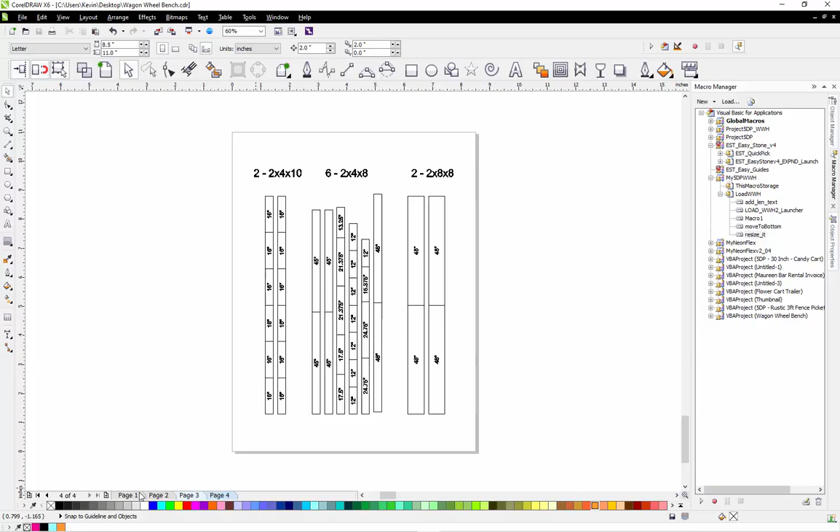And now we can go, if we want to make a 3D model, we can go into SketchUp and knock out a 3D model. Or if we just want to go straight to the miter saw, we can start cutting up some boards and building our wagon wheel bench. So that's how I go about doing it.

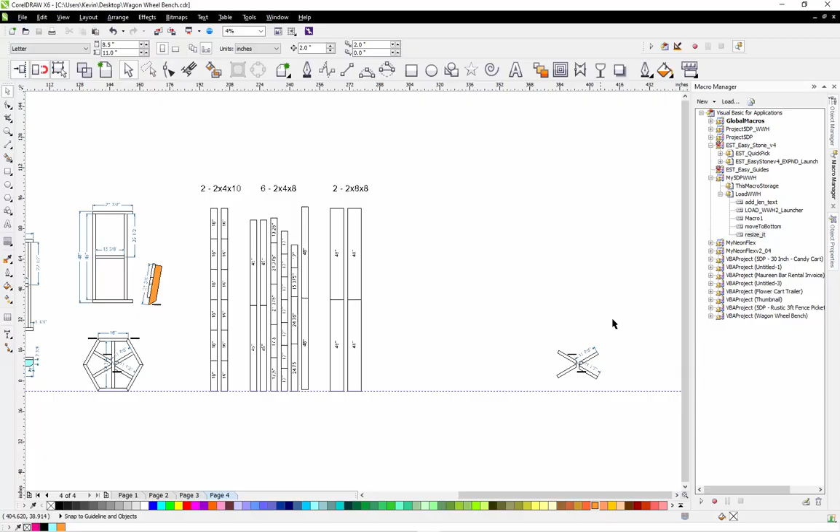I hope you enjoyed this one. Learn a little of what's all involved behind the scenes in making a woodworking plan. Thanks for watching.